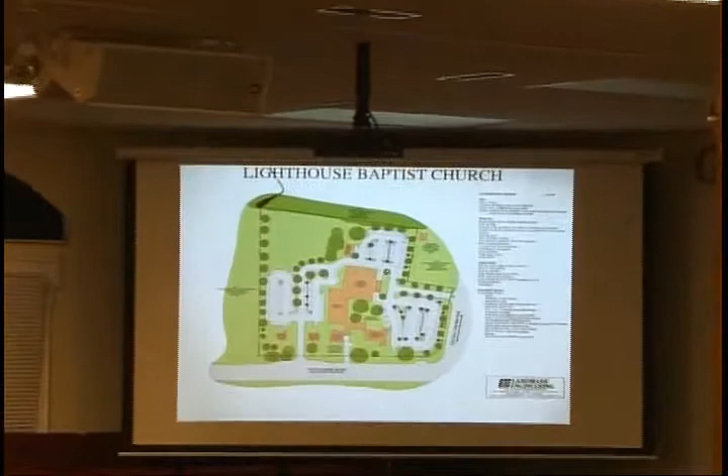So we actually are just completing a study where we collect all that runoff, and the outfall point, get this pointer working here again. The outfall point is right here behind your neighbor and goes right down to Old Baltimore Pike, and then it goes out to what's called Muddy Run. So we're finishing the design of that, and it's our plan to have everything stored underground and then released.

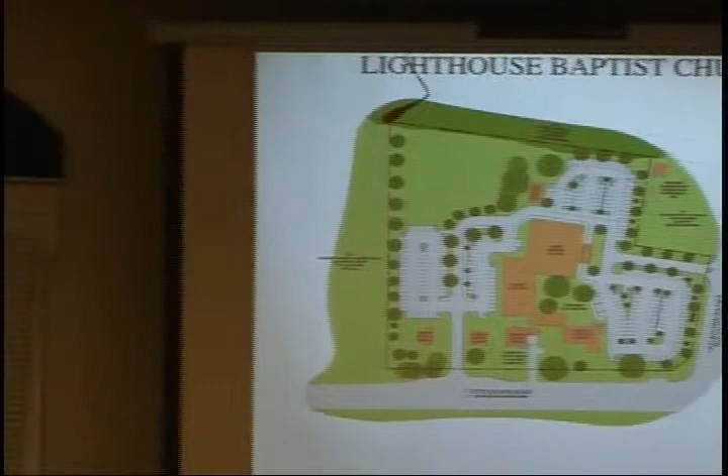We also design the underground system so that we improve the water quality. So the runoff that will come off this site when we're done is actually better than it was before you found this site. So we'll have clean runoff. That's also mandated by government controls, but you'll be basically improving the runoff, both quantity and quality, when it leaves the site. The traffic issue and the stormwater issue were the 2 largest issues raised by the public so far in our early meetings, and I'll walk you through that process.

The finished site, besides having the sidewalks and the curbing I mentioned, you'll also have public water and public sewer. Right now you're on a septic system, you're on wells. That system will connect you up to a regular gravity system that goes to the sanitary sewer treatment plants, and you'll be connected to Artesian Water Company, and we'll also be putting in lines so that we pick up these existing houses that also have a history of problems with the septic and the wells.

And of course, with the water, we'll be providing fire connections so that you actually will have sprinklered buildings. Again, more safety for the site. There's a minimum amount by code of parking lot lighting required. It's up to you all if you would like to have something beyond that, but we'll also be providing the parking lighting. Now, as the pastor mentioned, many of you have been, I guess, disappointed in the progress so far.

I just want to explain to you that the process has changed as we've been going through it. I think there's been a recent history of complaints in the general public that the county process is not an open enough process. So in response to that, we have doubled the size of New Castle County Council. There's more representatives out there representing smaller districts. There's more opportunities for questions. There are many more public hearings at which the public can come and react.

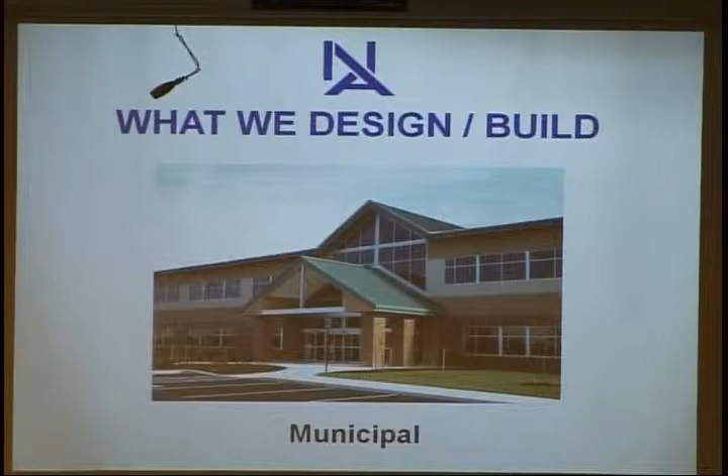Example: municipal projects - the new county building we just completed for Cecil County, just over the state line last year. Commercial projects such as this one, a two-story office building we designed and built a couple years ago for a local realtor.

Educational - we do work with some private schools like St. Andrews and West Nottingham Academy. This was a new science center we built a few years ago.

Healthcare - again, this was a doctor that came to us and wanted to open up his own practice with a couple suites. We designed this in-house and built it a couple years ago in the Middletown area.

Manufacturing - W.L. Gore and Associates, one of our bigger clients. We've built lots of facilities for them over the years.

Industrial - your simple metal building warehouses and more. This was one we finished last year up towards Wilmington.

Financial, whether it's Mercantile or Wilmington Trust or Bay First or Baynet or PNC, we've built branches for a lot of different folks around. Agricultural, again, here's some of the simpler buildings, glorified garages, and then religious.

Now, Middletown Baptist Church you may be familiar with. I started out with that slide, not coincidentally, because the plan you folks have come to us with has some similarities. Yours will take its own shape and form in the months to come, but that would have been one of our churches that we built here recently.

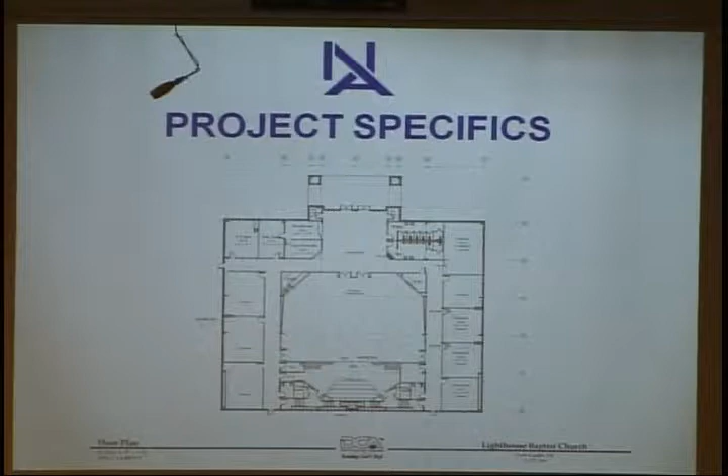So here's the plan that you've come to us with. That's the floor plan. I'm sure you're all familiar with it, and you've seen it before. And these models, which are wonderful, this is a service we usually offer to do for your own presentations, and I think you folks have a lot of talent within your church that have been able to help build models such as this one over here. It really gives us the answer key, makes our job so much easier. We just have to come and build it now in a cost-effective and quality way.

And there's the other version.

Now, I'll skip right through In Progress by Landmark. Bruce has talked to you for the last however many minutes about all the stuff they've done with the planning, the site design, and approval processes, and he's gone over his slide in great detail on what's been going on related to the site.

So what's Nowland Associates going to do? I've kind of answered a lot of these as we've gone through. We're going to complete the design, take that schematic, review it, and make all the architectural, structural, mechanical, electrical, and plumbing systems complete to meet your needs.

We're also going to do some planning for Phase 2. We're not going to go into great detail with complete design at this time, but we've already had additional meetings and discussions with your committees about, in that extra square footage down the road in Phase 2, what you're most likely going to want to put in there. So we've had those discussions, and we're going to use that.

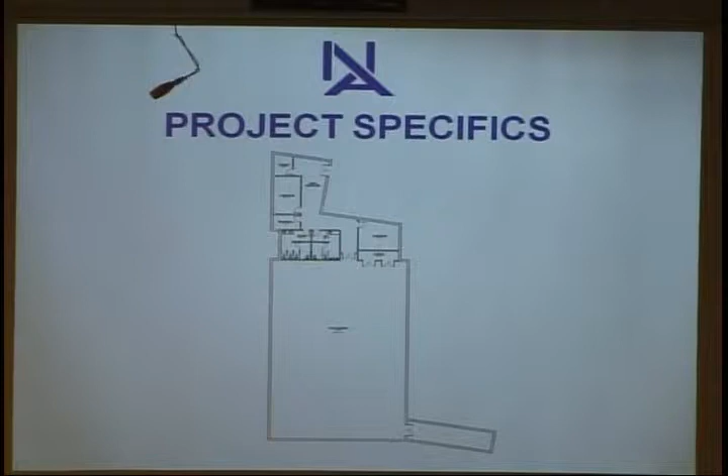This is just a quick slide on the phase 2. I won't even go into great detail with that other than to let you know we have put a little bit of thought behind that little connector link that was shown on the site plan. So with that, I'll leave it with our friendly little smiley face safety guy for questions for both of us.

All right, would you stand up, please? Give yourself a little bit of stretch. Going to ask the sound people to get some microphones up here, and we are going to take your questions, all right? Just answer the first one. There's a little bit of levity going around about who actually picked the colors of walls and carpets. It's very obvious that our teenagers should have that opportunity. And I'm sure there'll be purples and pinks and who knows what, teals and whatever. All right, you stretched out. Have a seat, and we will take some questions from you.

So, guys, if you would stand up here, please. Microphones are coming. Pastor Pritt, would you help also, please? Test. All right. Any question is fair game, especially to Bruce and Jim.

Yes, Mr. Willie. This is for Mr. Nowland. Is there anything with the new buildings that can be altered down the road if we decide to change anything? Like, I know somebody on the staff wanted to know if the seats could be changed later, so credit cards could be used to pay tithes in the back of the seats. Willie, he had a concern with that. But Willie has just asked if it's possible to have debit swipes in the back of the chairs so that we can pay tithes in the pews and the seats.

But we don't have a plan up there anymore, but we have that open green area. Bring that up, Pastor. Oops. We have the open green area there in the back left corner, which I didn't really talk about. That's just the open play area that you can all use. We have that area where we can put some of the fill material, and initially we won't be building the parking lot just below it, so we can put it in there too.

So we have a decent idea where the unsuitable material is. We'll know more when the construction is going on, but we've come up with a plan that we think is flexible enough, so even if we have some reasonable surprises, we'll be able to accommodate that in the site plan. Jim, how would that affect the footers in the building, knowing that there is questionable debris under there?

Well, knowing that there is questionable debris, we'll be better prepared to have the engineers on staff ready to test that soil. Certainly the county through their inspectors, but even before them, the site engineers and ourselves will make sure that that subgrade is good material, and if it's not, we'll cut it out all the way and bring it in. Season plays an important role in that when you're bringing in the material and you're compacting it, and you have to meet certain requirements.

Until we start digging, we won't know how much is there or how much needs repaired, but it's certainly something we do all the time. And we know how to do it and how to do it right, and it'll be tested before the footings are placed, so that we can be sure that there won't be any settlement in the future.

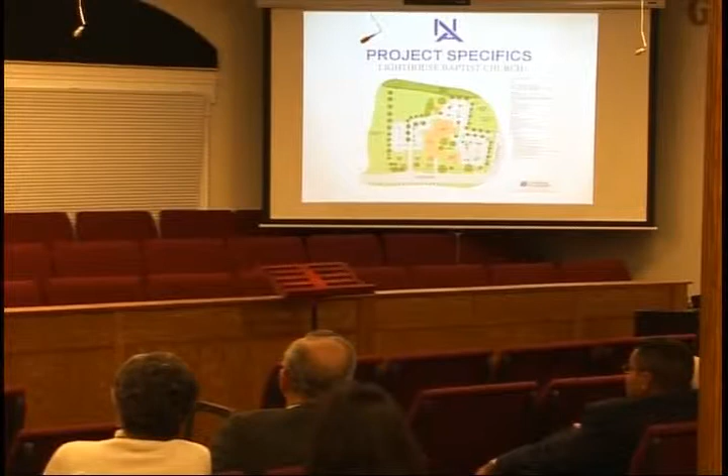All right. Without getting into too much detail, the drainage on this site's broken into a couple components. You have drainage that's running down right here in this area and goes into a major storm drainage system that runs along Old Baltimore Pike and eventually goes to Muddy Run, the creek that you cross if you're on Old Baltimore Pike. You have the flows that are generated just on your site, and then you have what we call bypass flows that basically run through this low wet area.

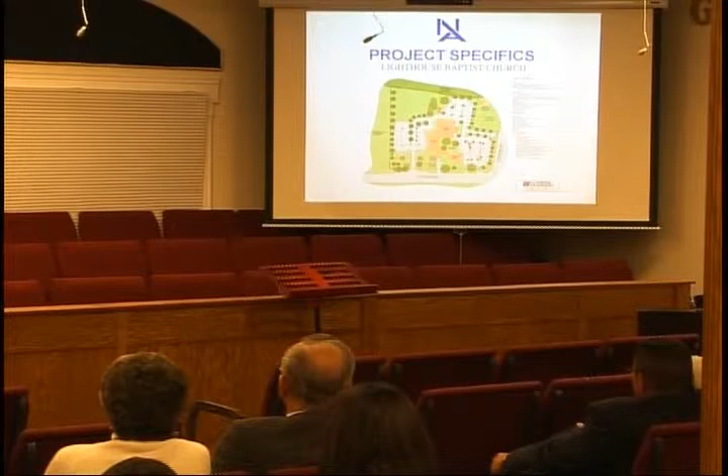If any of you walk back there, it's wet almost all the time. That's getting a lot of overland flow that goes all the way back up these properties, some of which goes all the way back to the crossing with I-95. It's a very large area. So what we're going to be doing is we're picking up all your site runoff, including some of the runoff that today gets into this system here that doesn't have enough capacity, and we're going to take it and control that runoff.

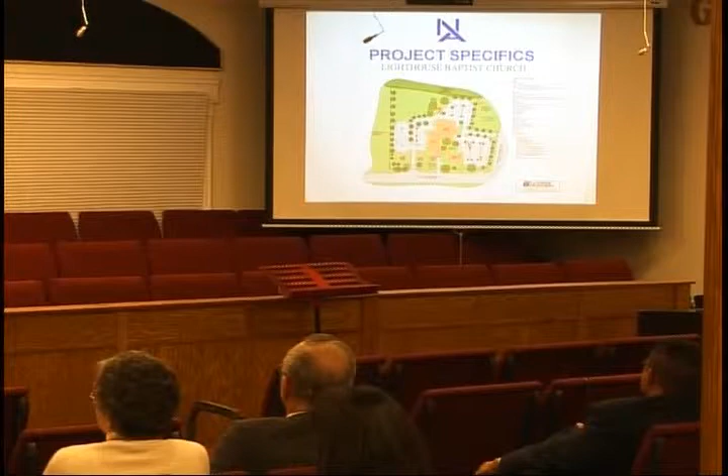And we are restricting the amount of runoff that leaves our site so that when you combine what naturally collects in both along the road and in these off-site areas, we will not exceed the capacity of this system here. And we are making sure that any runoff from this site, not one drop of it goes on to the adjacent neighbors. It all stays on our site. So you're definitely not making it any worse, and it looks like you're going to be making it better.

Is he happy with that, with your finding? He came to the planning board public hearing. We had the opportunity in this kind of forum to give him a general answer. He came and approached me after the meeting, and we talked in more detail, and I think that they are happy with the approach. At that time, I had very general answers.

When we meet and talk this time, I can actually show them plans with cross sections of what's going to be put in, and results of the drainage study that will show that for all the different storms that take place, the amount of water that's released from this site is actually lower than it was before you built anything. So I think the odds are pretty good that we'll be able to address his concerns, yes.

Okay. Questions about the building itself, questions about the site, entrances, traffic, anything. It's fair game. Mr. Lacey. Bruce, you mentioned some plans that must be presented at the end of November. Preliminary plans? Yes. Those are plans that pretty well we're up to speed on. They're ready to be presented. Is that at the end? We've been working towards that goal for quite some time. We'll be in good shape to get those plans in.

Those plans, if they're turned in by the end of the month, get mailed out to, well, actually now it's turned around to where it's the consultant's responsibility to mail it to these approximately 30 different agencies. And they have 1 month, 20 working days, to respond. They send all their comments back to New Castle County. New Castle County Planning Department gathers all those comments, and then they send a response out to us. So to answer your question, yes, they're in pretty good shape.

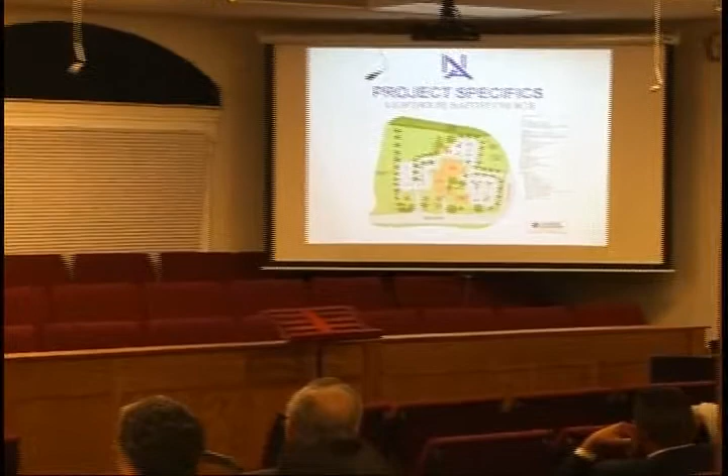We've had locations where we've actually painted the basketball court in a lower use area that's used for parking. We could do that. Or anywhere that you see green around you, we could put a basketball court in. There's plenty of opportunity for that. That's not controlled by the county. You don't have to do that right at the beginning, and you can go back and do it whenever you feel like it. As long as you don't want to build a stadium.

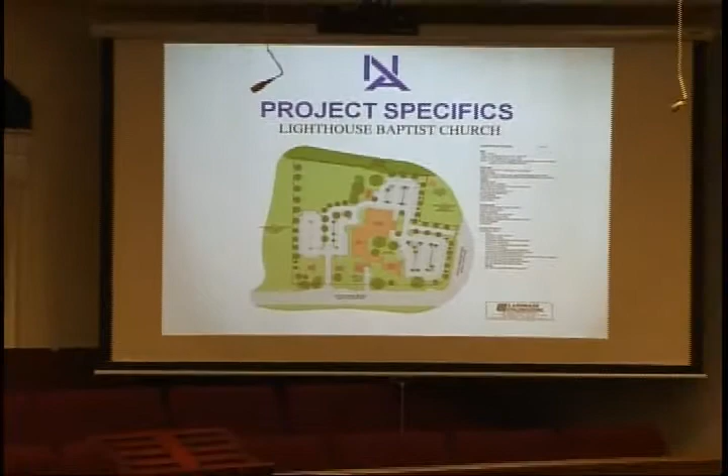One exciting thing is that when all of our leaders came together with a brainstorming and seeing what God is doing with youth and all that kind of thing, it rose to the top that the 9,000 square foot building have a gymnasium in it. Okay, so that, by the Lord's timing, will come in His plan, His desire. So we'll not forget you.

All right, right here, let's go like popcorn and hit as many questions as we can in the remaining 10 minutes or so. Yes? So we're going to keep the White House and the Sears houses? We are trying very hard to keep all of the houses. This plan of this entrance off of Otts Chapel Road being between the houses is we're hoping with DelDOT that will go through, and we're praying and hoping that we will not have to lose the White House.

We have not poured very much money into the White House because we know there is a possibility that entrance would have to go through the White House. But we're trying very hard to keep it, and if we do keep it, we'll beautify it. There's plans for its use. There's always something you can do with it. Sure.

Something else. Yes, Mr. Greg. Is the playground going to get bigger? It is. That was a quick answer. Can you give us, Mr. Bruce, an idea of how much bigger from what it is now? Well, what's shown there now, the green area you see there right now, is approximately the same size that you have today. But until you build phase 2, the playground will be twice the size.

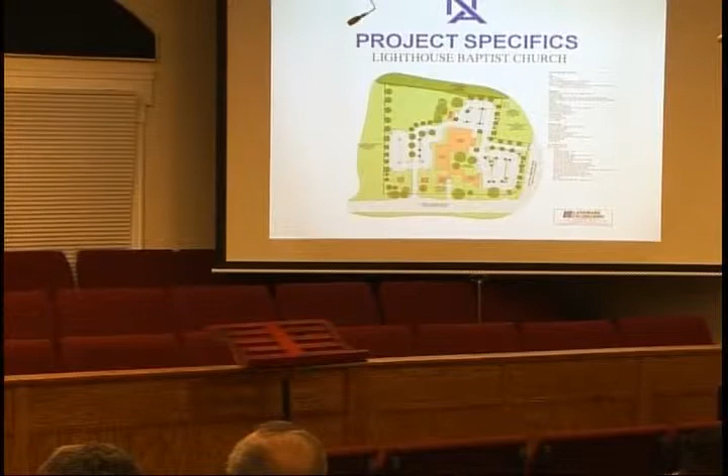What you won't see is that there's going to be pipes - very large pipes that sit underneath in this area, strung together side by side, tied together with other smaller pipes, with stone around them. All that runoff goes into that, is stored, and is released. So when you come to church and use that parking lot, it won't look any different to you than any other parking lot you've used. All those pipes will be hidden.

They will cost extra. As the pastor said, more facilities are using that because the additional cost to put those pipes in is far smaller than the value of the land they're replacing. They give you more usable land. Land is so much more valuable than the space used up if you tried to do something on the surface. So the cost of those pipes will give you that soccer field, baseball field, football field, whatever you like to play - softball, bocce ball, croquet, you name it.

Knitting. I was just caught up in the moment.

Originally, we were looking at a far more expensive alternative to that stormwater management. Landmark came to us with an option. There's a fellow named Mike Briscoe that works along with them, and this is a less expensive alternative than what we could have had.

Could you just take a minute and explain? He was talking about a system that would cost a lot more at first, and came up with this system instead.

The industry that makes the piping systems used is basically governed by a federal mandated code now that controls the quality and quantity of runoff. The state of Delaware has adopted regulations in response to that, and then New Castle County, in this case we're in the county, is responsible for making sure that everybody follows that state mandated code.

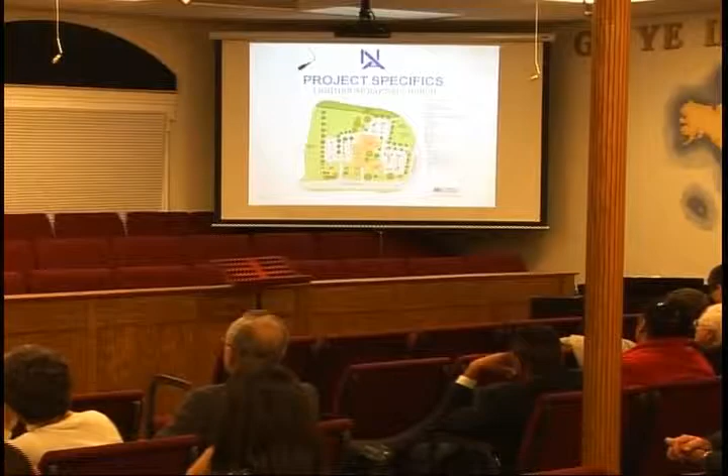There is a very, very stiff sign code in New Castle County, again responding to the proliferation of signs, especially on commercial property. So we are not sign consultants, but I would tell you that you probably are going to be limited to one major sign, a monument type sign, and the best location would be there in the corner, obviously, for visibility. If the signs are smaller type signs, you might get away with one on each road. But I think for the size that you may want to put in, especially if it's a type that you might want to put an inspirational message or a message about meetings or things like that on it, you're probably going to be limited to one major sign.

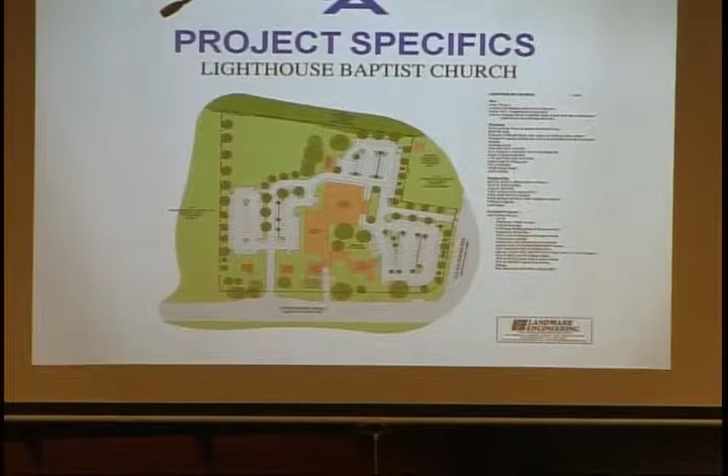Then you'll be allowed identification type signing, the name of the church, on the church physically itself. The sign that we presently have out there is the maximum square footage that we are allowed by New Castle County. Now, we can have a beautiful giant stone or brick facade around that, but the actual sign itself, the biggest you see is what you got. And we went and argued and worked, and actually Stan Baranowski tried very hard to get us bigger. That is it.

Can't be taller? It can't be taller. Pastor, am I right? It can't be taller? Not sure. The square footage is the largest, the maximum square footage. We do have some designs about the ultimate sign, but we have a few other things going right now that we have not finished.